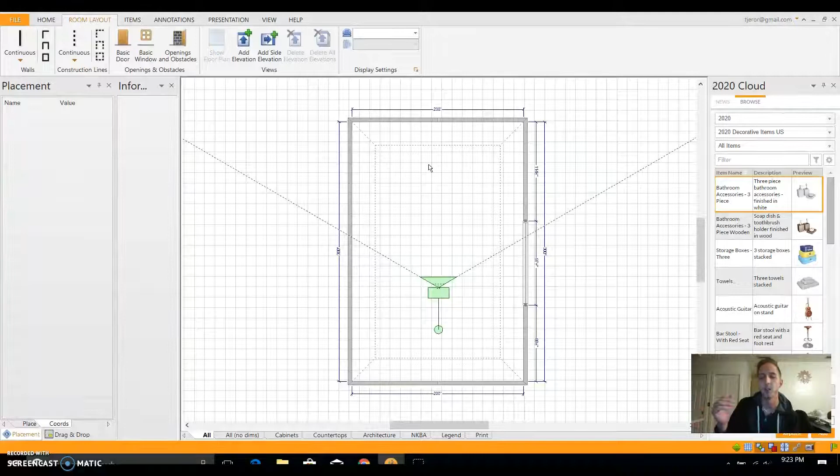So you really got to - unless there's another way, and I'm sure there probably is another way that I'm unaware of, but I haven't found it yet - this is going to be what I find to be your best bet.

Now, I've already got this room drawn up. If you don't know how to do cathedral ceilings, I have another video about how to do cathedral ceilings, feel free to check that out. I don't want to go over the same information again, but I've just got this set here at 96. The center here is at 120, 120 on this one, and then 96 here again. So what you're going to see is this - this is what I've actually got at this point.

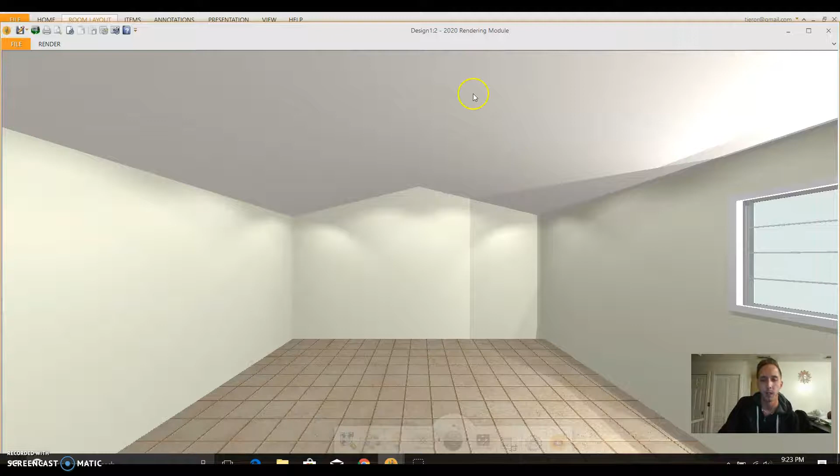So now if you want to create beams on this cathedral ceiling, again, it's tricky, it's time consuming and it's messy, but this is going to be what I would consider the best option for what you can do.

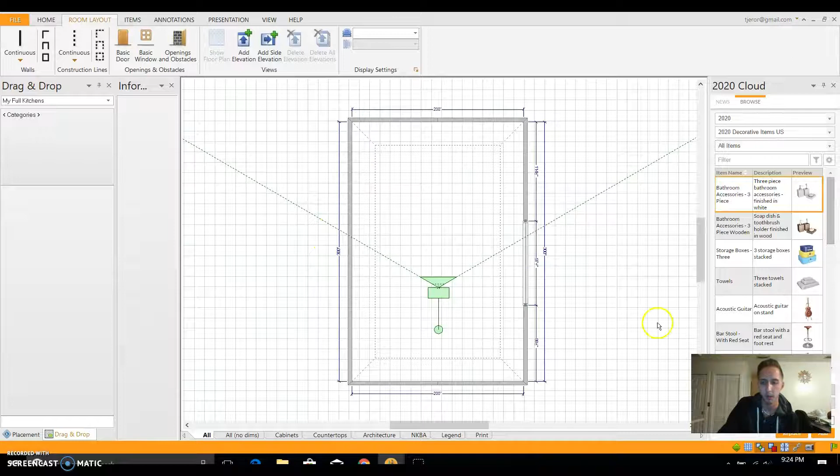So what you're going to do is go to a wall. You're going to create a wall, and I know there's different ways to create walls here, but let's do it the right way. I'm going to edit the wall, right click again, and add a wall. Let's just put it in here. I'm not going to be specific where I'm going to put it. You're going to want to space these out evenly, but I'm just going to do this for now.

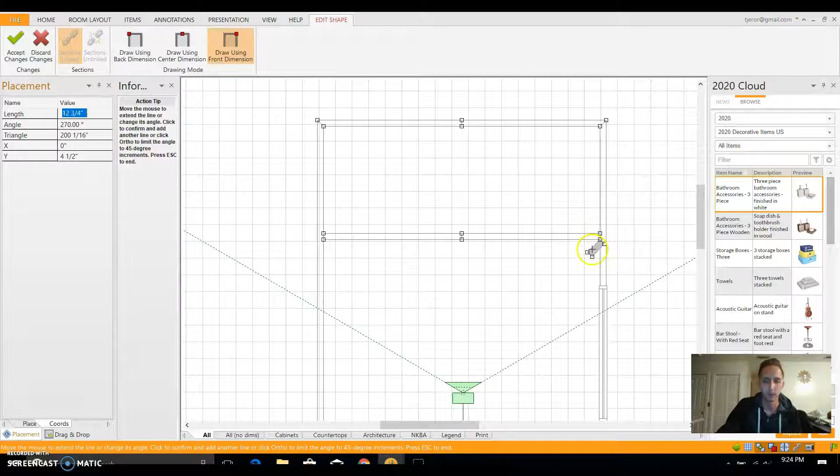Since I already know that I've got my other walls here at 100 inches, I'm going to put it there, and then I'm going to do it again. So, alright, there is now another wall inside here.

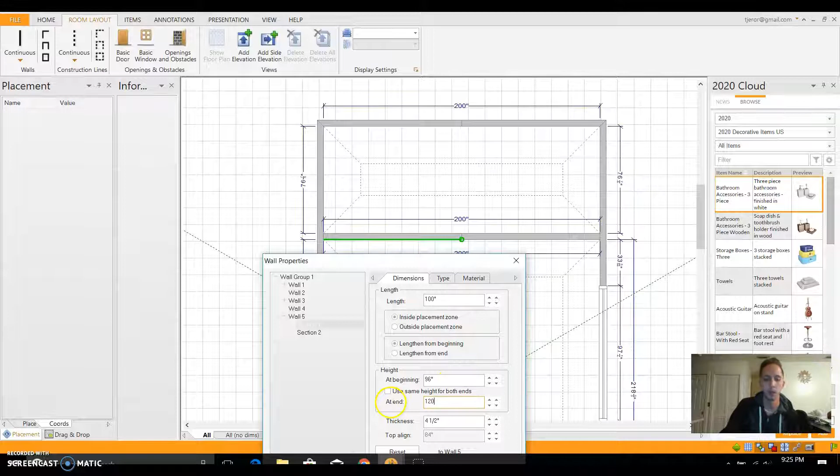Now what you're going to want to do is the same thing with these as you did on the outside. I'm going to want to take this and change the height in the middle to match the 120. And same thing over here. So there you have it.

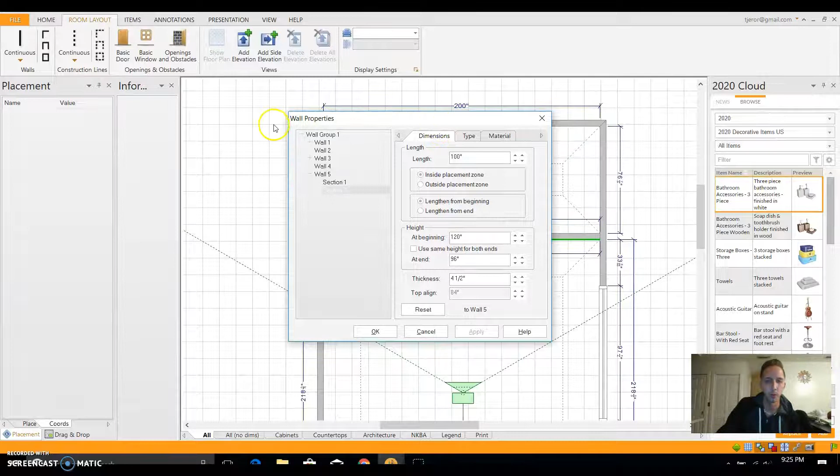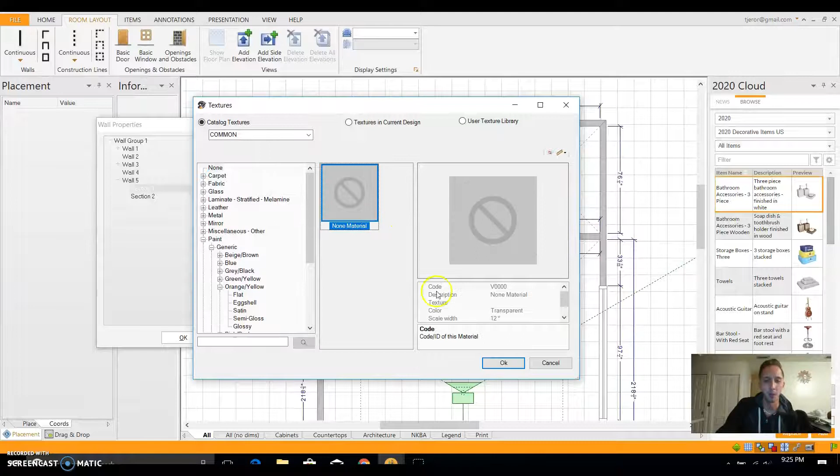There's that. And this is the part that's honestly kind of shady in how we're going to do this. We're going to go into both of these walls, go to material, and use both sides of this. You're literally just going to go to none. It's V0000, it's transparent. So what you're doing is actually creating a wall that doesn't exist. It's like a ghost wall.

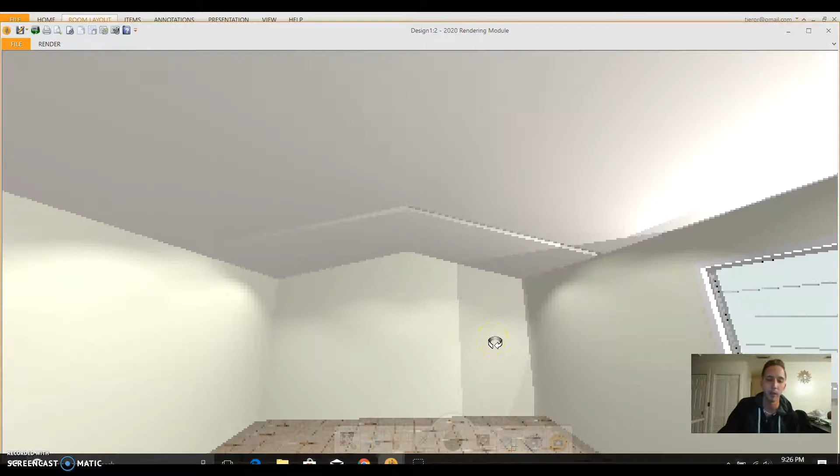So there you go. You can see it on, well, regardless, that doesn't matter. I think I might have different height walls here because it doesn't normally do that. But anyway, you've actually created an invisible wall here, and what that does is allow you to create an elevation view of that wall. And so this is going to be it right here.

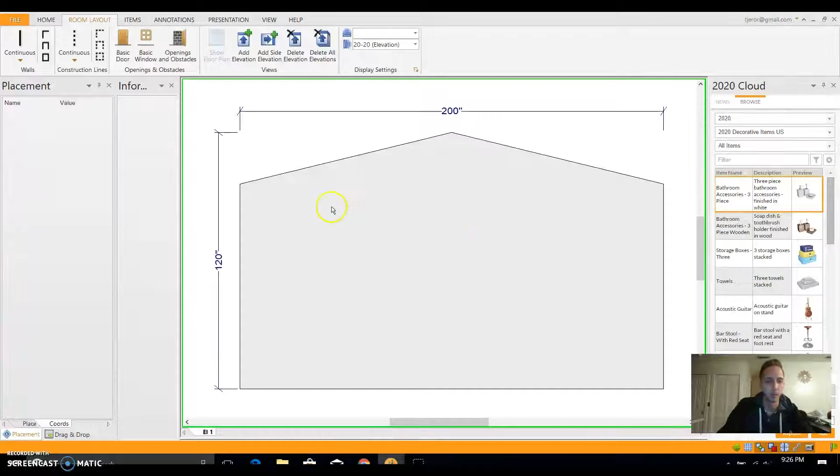And what I'm going to do, and again, I know this isn't perfect, I'm just working with what I've got, and this is how I've done it in the past to make it work. Go to surface, and actually turn off this so you can make whatever angle you need to. So coming down here, you're basically going to create the shape that you want, which would be like a beam.

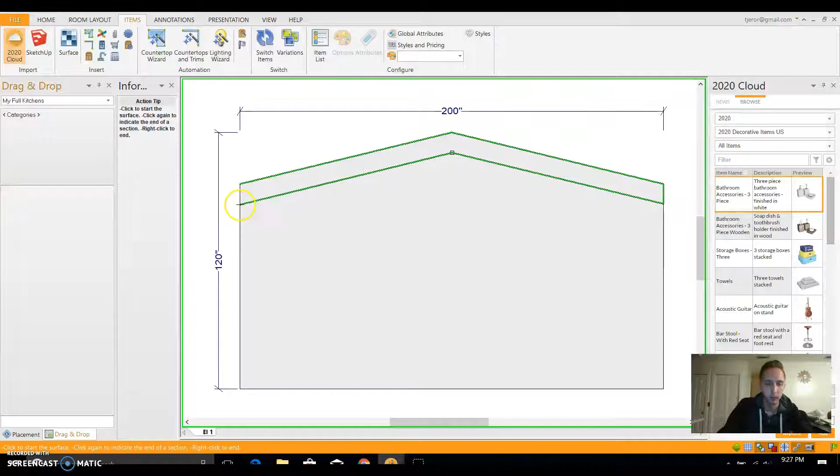Then what you're going to do is make this texture whatever texture it would be, which in most cases is just going to be some kind of wood. So we'll go into wood, furniture, generic, pecan, matte, and there. So now it's a wood.

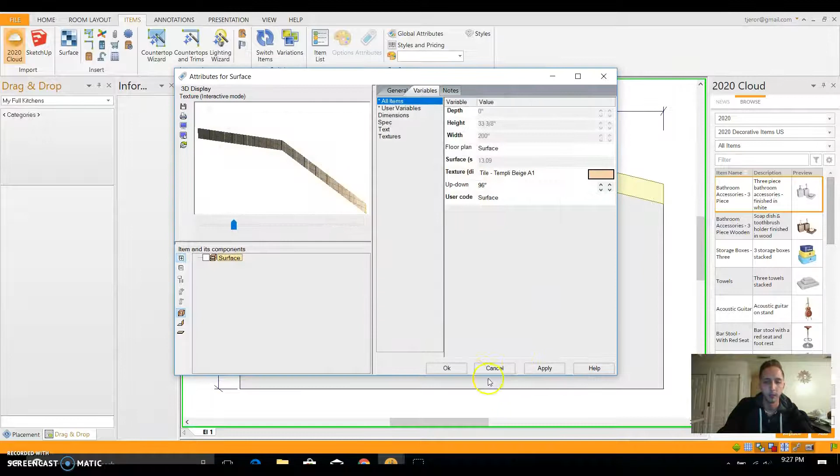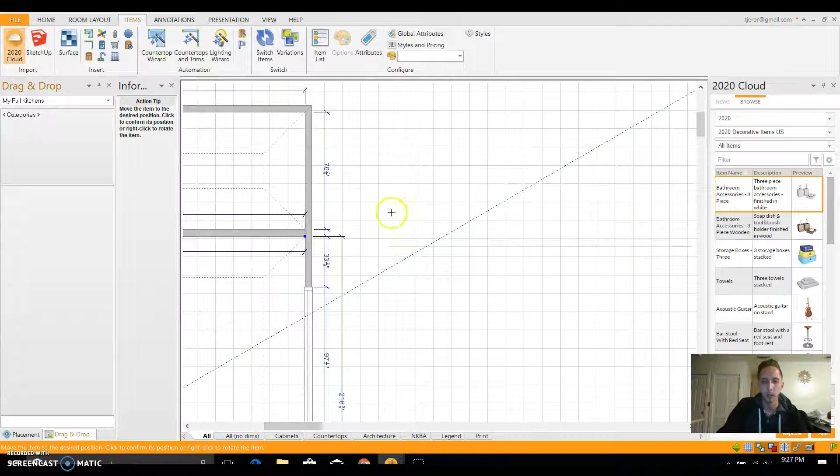And then what you're going to do is go back to your top view, and you can't see it on this, but if you right click it will allow you to surface right here, and then you're going to duplicate it. When you duplicate it, you're going to want to pull it over here, just pull it out of the way so it doesn't get stuck on another wall. And then you just plug it in on the other side of the wall as well.

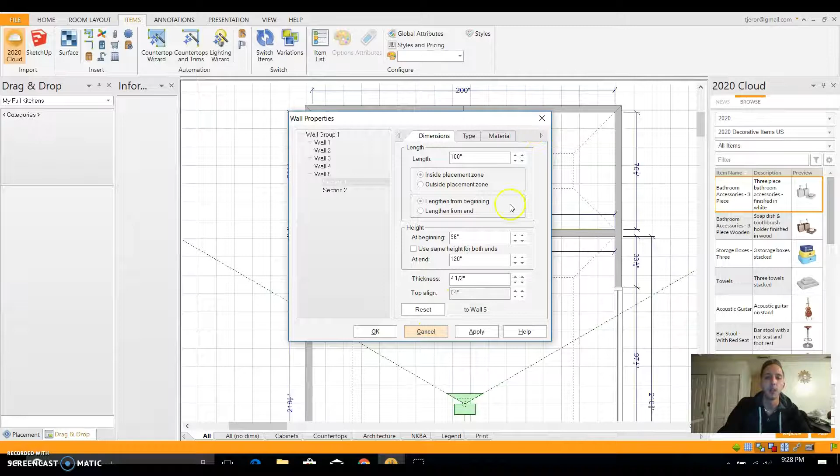Now this wall, you can actually change the thickness. Of course you know that. All you've got to do is go in here and change that thickness to whatever you want. So if you want your beam to be 12 inches wide or whatever you want it to be, you can change this and it doesn't affect it, it makes it so you can actually do that.

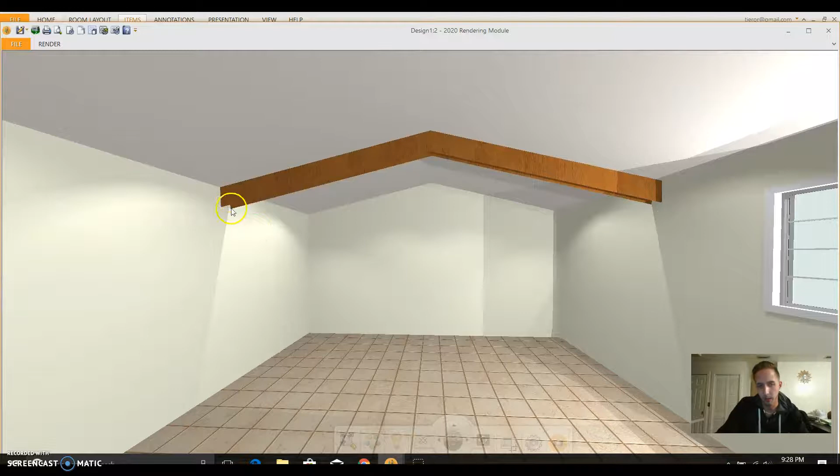So if you go back in here, you can see that, of course, like I said, it's not perfect. What you can also do is create a layer over here for the wall itself so that you can create another surface so that the wall is not so obvious, where these come down like this.

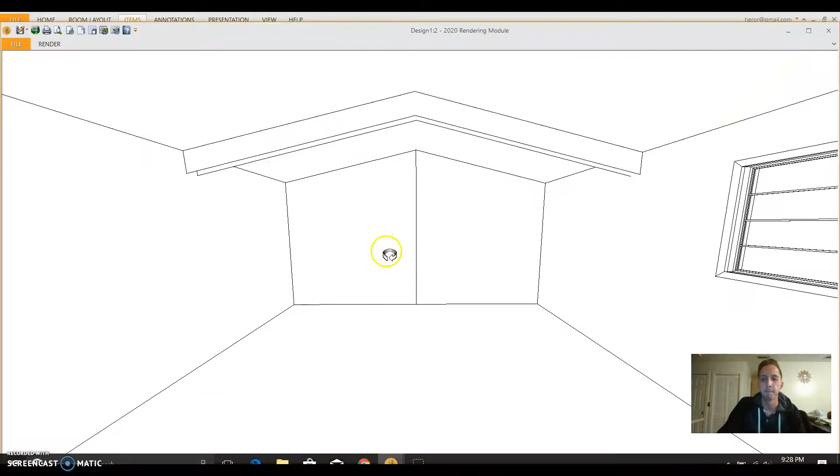Really, that's about it. That's all I really got for this. If there is another way, and I'm praying to God that there is another way to do this, because this is so messy. It's a really hard way to do this, time consuming, and it just doesn't look really the way you want it to look.